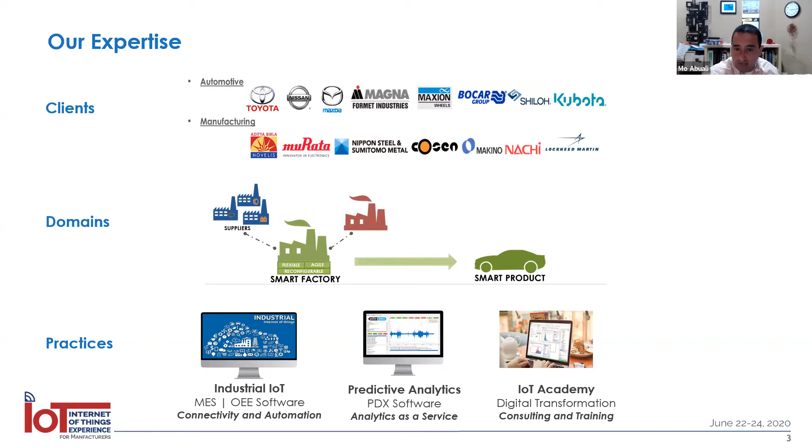I personally have been in the industry for about 20 years. I've worked with companies like Toyota, TMMK, and conducted projects with a lot of automotive tier suppliers, many large, but also many smaller manufacturers, like Detroit Manufacturing Systems. Actually, Isaac will introduce the company later - it's a mid-sized manufacturing company.

Our agenda for today is really four things. I'm going to preface the presentation by giving some introduction and definitions around what is the Internet of Things, what is industrial Internet of Things, industrial IoT, and what is the role of technologies like predictive analytics, OEE, and manufacturing execution systems. We want to talk about digital tools that can support any manufacturer to mature their digital journey in a phased approach, keeping return on investment in mind. Then I'll hand it to Isaac, and he will discuss his personal journey, and the journey of his organization, Detroit Manufacturing Systems, along digital transformation.

Let's get started. The field of Internet of Things is by no means a new field. It has been around for many years, many decades. We've been monitoring safety critical assets and machines and components for many years, even though it was not called IoT, but there has always been the use of data collection, the use of the internet, and the use of connectivity to collect data from jet engines, trucks, airplanes, homes, cars, power plants, nuclear operations, etc. So the Internet of Things is a field about using internet connectivity and analytics to cover all industries, all things, and all devices.

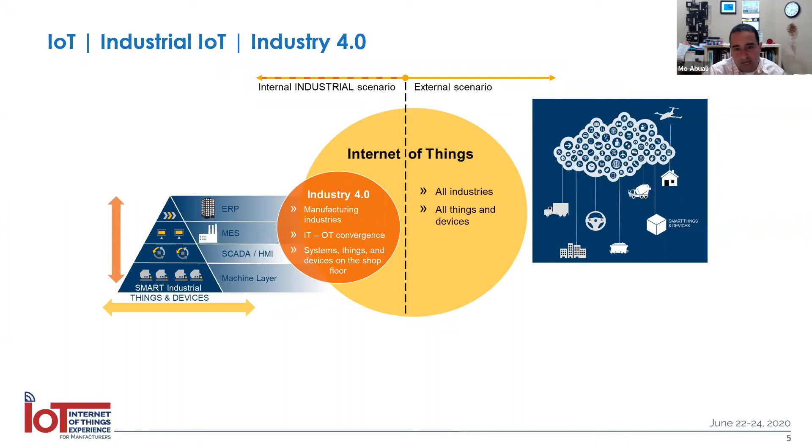And later, Isaac is going to talk about their story of how they were able to make that convergence happen between IT and OT. So Industry 4.0 is a strategy, an initiative for manufacturers today to start adopting industrial IoT practices and improve productivity.

So in a nutshell, when we talk about an Industry 4.0 or digital transformation strategy, we're talking about 4 pillars that manufacturers today should keep in mind as they evolve their maturity on the digital horizon.

We usually start from the right and go backwards. We start from the ROI, the return on investment. What is the business case? I will show some examples of improvements in uptime, improvements in OEE, reduction of scrap and quality issues, and improvement of spare parts. So technology adoption and digital maturity must be able to impact your business bottom line, which is your P&L, your profit and loss statement.

And then we go backwards to connectivity. Are you connected? Are you collecting the right data that is meaningful for the business case you're trying to achieve? Next, we talk about analytics. Now that I have the data, what do I do with it? How do I have real-time metrics, and how can I predict future behavior or future issues down the road?

And once the strategy is proven on a smaller scale, maybe a pilot scale, we talk about scaling that technology, the architecture, rolling it out to more machines, more factories, more geographies or continents across the world. So what's the technology architecture of scaling that solution? Your business case, getting connected, doing analytics, and deploying the right architecture for the technology.

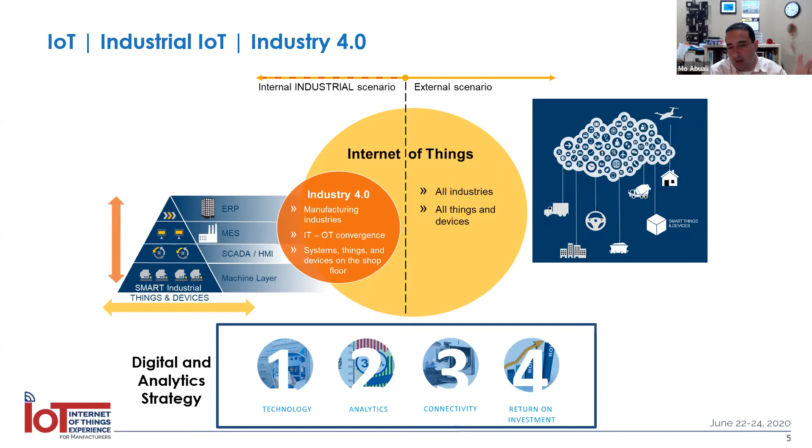These are the 4 key items that I'd like to touch upon, and then Isaac will educate us on how practically they were able to do this within their operation.

I want to give a very simple definition of Industry 4.0. This is a nice graphic showing the transition from Industry 1, 2, 3, 4. Industry 4.0 is about a digital connected world. It was initially a German-led initiative by the German government, which was scaled in Europe and then later in the United States. In the US, the National Association of Manufacturers, NAM, refers to it as Manufacturing 4.0 or Smart Factory. Different organizations have different namings. GE, for example, refers to it as the Brilliant Factory Initiative.

But I want to give a very simple definition: Industry 4.0 is about combining traditional manufacturing practices today with the technological world. Industry 4.0 at its heart is about technology and process, but also about people. And the right mix of people, process, and technology, and the right way that this transitions from an Industry 3.0 to a 4.0 domain, is our approach and how we see manufacturers being successful.

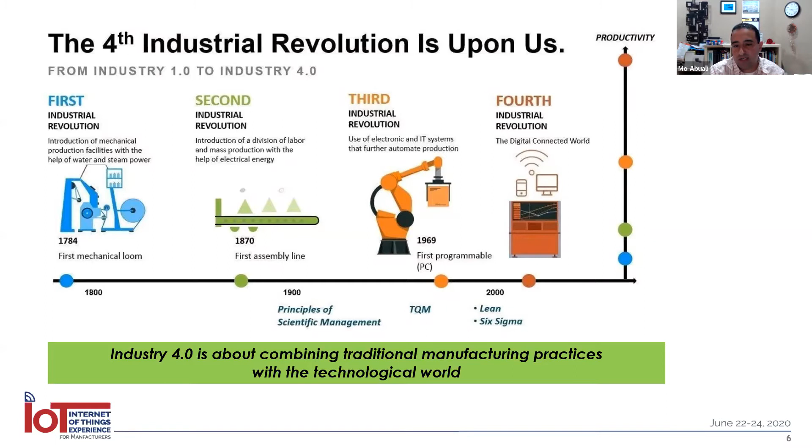So let's briefly talk about people, process, and technology. I want to start with people. This may be the most difficult bubble in the Venn diagram because there's a lot of change management required, maybe improvement on the culture side, and how to make the data and technology integrated cohesively with the people. We like to say the right information should be sent to the right person at the right time.

And we see a lot of manufacturing environments today that are starting to become more automated, so moving from operator controlled to operator intervened to even a lights out manufacturing operation. I heard an interesting naming - they called it a dark factory. A dark factory is a lights out operation that may not require operators to be actually controlling the machines. So it's important to understand the maturity around the people side and the general strategy of evolving the people element in the operation.

Then we talk about process. We're seeing a transition from reactive thinking, short-term thinking, manual processes, to a more proactive, scheduled, long-term approach, to even self-optimizing processes where data is connected automatically, decisions are made automatically, and may even be fed to the machine or the line automatically, so the line can have a self-optimizing approach to running the operation. So there's an evolution on the process side, and then there's the evolution on the technology side.

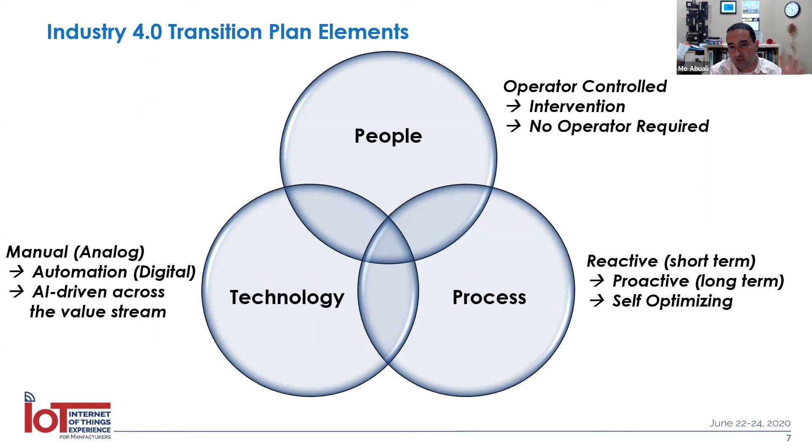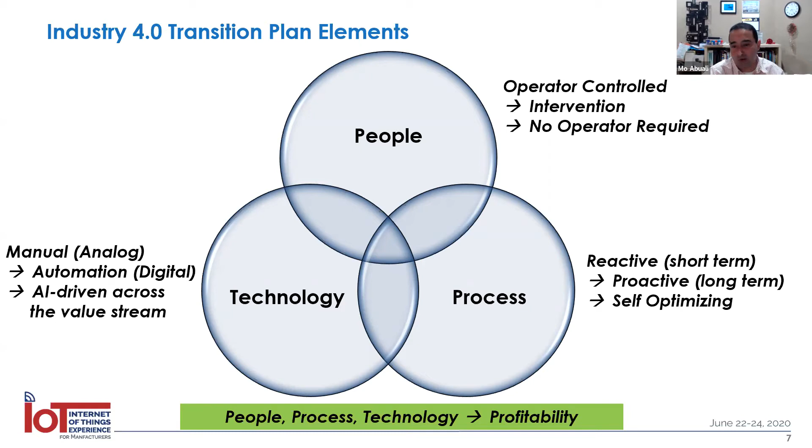But we believe that it's important to understand the digital maturity across your people, technology, and process. And usually the best transition or transformation to Industry 4.0 is governed by your weakest link. So if people is your weakest link, it is important for the company to focus there and make an evolution, versus trying to deploy technology in a factory where maybe the people side of the coin is not ready. With the right recipe around people, process, and technology, there is a quicker approach to achieve ROI and profitability in your digital transformation journey.

So speaking of ROI, it's important to start with the business case, and it's important to track metrics. OEE, overall equipment effectiveness, is a key metric today in manufacturing. By collecting data and having visibility and delivering the right information to the right person at the right time, the OEE metric is a key metric to be tracked in real time and to be improved. Predominantly uptime is a key metric within OEE - availability, performance, quality. So uptime is a key metric for some operations.

We are also looking at using analytics to improve maintenance activities. By catching, detecting, and reducing unplanned downtime using analytics, there is a great opportunity to optimize maintenance activities and to move from a reactive maintenance environment to a predictive and preventive maintenance environment.

We see manufacturers tie into their spare part inventory by having data collection and a predictive approach to monitor your assets. There is no longer a need to keep a high value of spare parts waiting for things to fail. We see manufacturers using analytics to drive reduction in their spare part inventory and being able to be predictive in the replenishment of new spare parts.

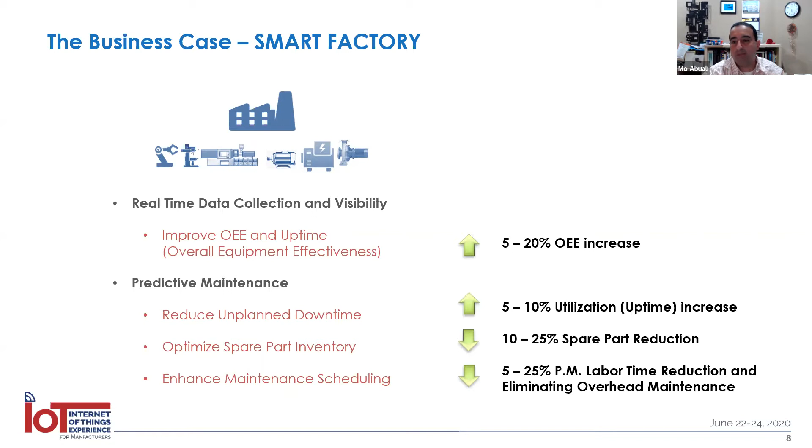The numbers I'm showing here are true numbers from manufacturers today, large and small, who have embraced analytics, connectivity and data collection. They have seen immediate improvements anywhere between 5 to 20% in their overall equipment effectiveness, 5 to 10% in their utilization, reduction in spare parts of almost 25% by being able to optimize maintenance and use analytics, and reduction in labor time.

When we used to work in automotive plants, when you go and fix a machine, you have a very strict time-based schedule, and you would go in on a robotic, for example, and change the bearing in all 6 joints of the robot. But now that we're able to sense data from the robot and predict that a specific joint is going to fail before it fails, you can reduce the labor time, fix the right area in the robot, and reduce your spare parts.

So it is a maturity curve. It's a phased approach for your digital journey, but it all starts by getting connected, analyzing the data, and having proactive decisions.

Some manufacturers have eliminated overhead maintenance. Due to the time-based schedule of maintenance, they used to run maintenance on weekends, Saturdays and Sundays, but using analytics and making optimizations, they've actually been able to eliminate weekend maintenance and drive a just-in-time maintenance approach to their factory.

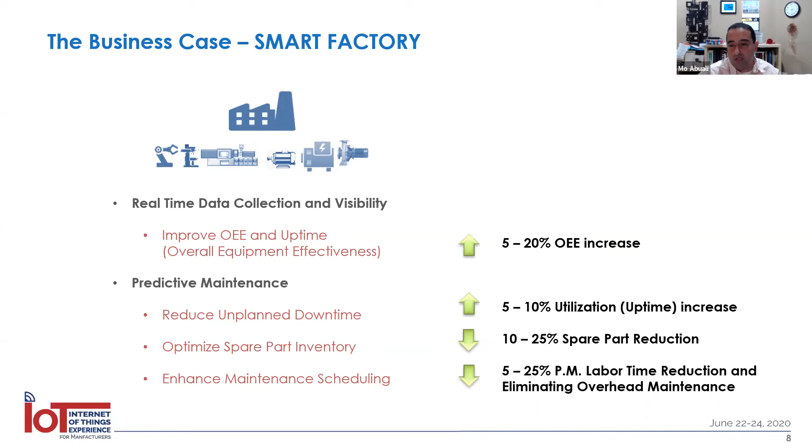So start with the business case and have the business case dictate where you are today, and then what technologies should be enabled to support you to digitally mature in your journey.

I want to touch on a few technologies just to give you a feeling. I want to touch on connectivity to the machine layer. I want to touch on data collection and metrics. I want to briefly touch on manufacturing execution and predictive analytics. I want to give a hint to some of the digital tools that are around today.

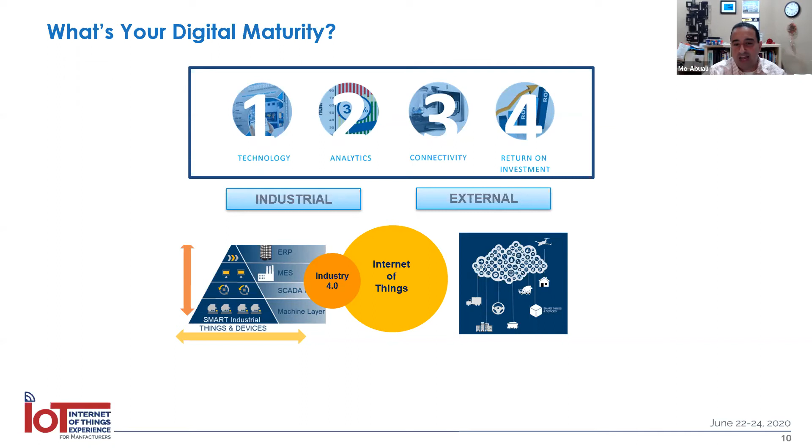I'm going to start from industry 3.0 up to industry 4.0 technologies. The reason I'm doing this is we believe those 4 pillars are indicators of your digital maturity. We have an assessment approach when we work with clients where we do a digital assessment, looking at and benchmarking where the manufacturer is regarding connectivity, acquisition, metrics, and MES, and using that to create a digital readiness analysis and report to support the manufacturer.

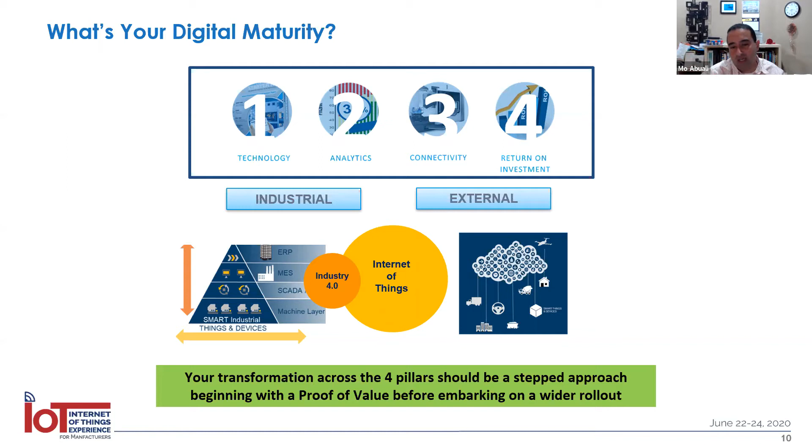So ask yourself, and you may already know the answer, what is your digital maturity today across those layers: your machine, your data collection, your execution, and even your ERP? Let's start at the bottom of the pyramid: connectivity.

Some say manufacturing data is the new oil. Manufacturing data is the foundation to achieve ROI. It's very important to have a data lake, and that data lake should be able to support multiple systems, be it your OEE system, your ERP, or your execution system.

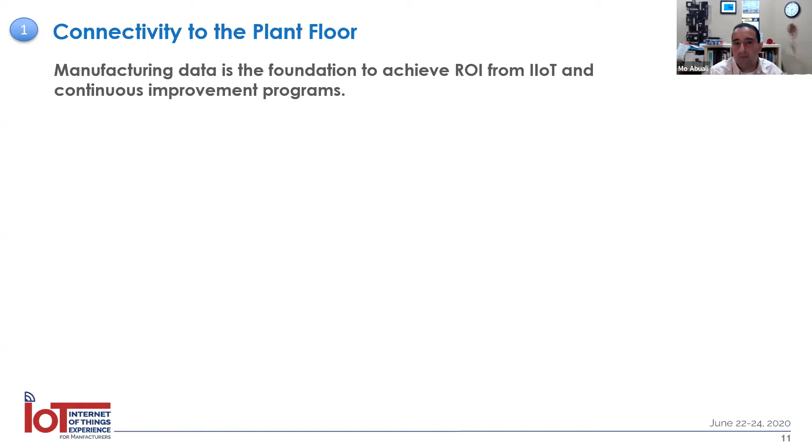When we go in, we look at and ask a few key questions. Is the machine capable of communicating today? It's important to understand that in any manufacturing facility, there are new machines and older machines. Some machines have an Ethernet port, some have been around for decades. They're still running, still making good parts, but they are legacy machines, and there has to be a way to communicate with those machines.

It's important to look at the network side and the cost benefit of networking and cabling the machines, making them IoT ready or IoT enabled. We look at time - how long is it actually going to take, and what is needed on the machine to be active, and what is needed externally on the software side to communicate to the machine.

The most important question at the end is, what data do you need from the machine? So what is the use case? The use case dictates the type of data that I need to capture from the machine. I'll talk about some examples here.

But we always start with an audit. A senior automation controls person would visit the operation. Depending on the size of the factory, there will be a 2-day, 3-day, or 4-day audit. It's important to open control cabinets, look at schematics, and have a clear understanding of the age and capability of the machine to communicate to the outside world.

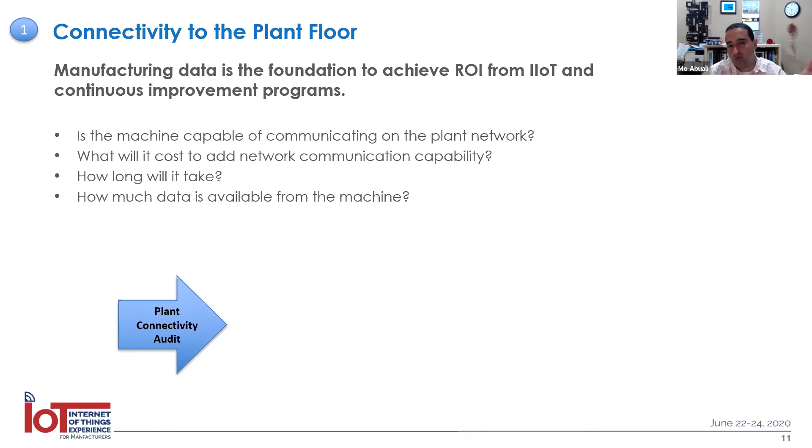Then we have a connectivity process that we follow. We look at network readiness - does the machine have an Ethernet port? If so, is the machine connected on the network? If yes, what is the data map that I need to capture from the machine? What are the signals or tags that are indicative to the OEE or to the use case that I'm trying to derive from the machine?

If I'm looking to capture real-time OEE on a machine, for example, I'm looking at the cycle start on the machine, machine on/off, a piece counter, maybe a reject signal from the machine, and the fault code - what are the fault codes or warnings happening on the machine?

There are specific data maps or data models that are important to identify, and those data models are then made available using a data lake, a historian, an OPC server, an MTConnect agent - there are many ways. It's dependent on the machine type, the capability of the machine, the age of the machine, and so on. But it's very important to make your assessment here on the connectivity side, because connectivity is your foundation, and connectivity enables the rest of the systems to go in place in the right approach as you mature your operation.

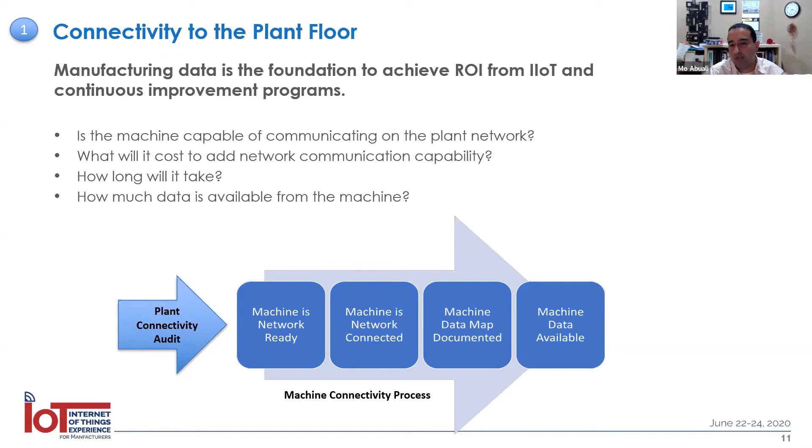So now that we're connected, the data starts flowing, and the data is used to drive real-time metrics to the manufacturing operation. We define two types of metrics: performance metrics, which historically give you an indication of your overall equipment effectiveness - that's your OEE per machine, per line, per building, per plant - and enterprise level benchmarks.

Don't get me wrong, there are many other performance metrics as well. There's your mean time between failure, your mean time to repair. Some folks use TEEP, theoretical efficiency of the machines. And then we talk about predictive analytics, the health of machines, predictions of issues that might happen, remaining useful life. When is my spindle bearing on the machine going to fail before it actually fails?

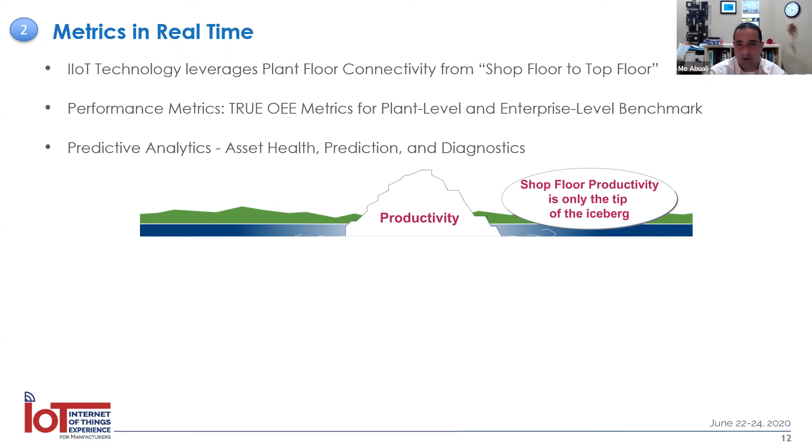If we look at it from a simple iceberg chart, a lot of folks are measuring productivity today. They're measuring pieces, how many scraps, how many hours the machine was running. But if you look under the surface of the water, we're talking about unleashing the opportunity in the hidden factory.

We're talking about metrics that drive productivity: uptime, real-time uptime coming from the machine controller, and performance, measuring the speed of how long it took you to actually run a part. Your ERP is a great solution - it's telling you that your standard time to run the part is 30 minutes. But how much do you trust your standards today, and how can you improve your standards?

By communicating to the machine and tying the shop floor to the top floor, you're able to clearly understand machine runtime, part runtime, which is your performance, and quality - how many pieces, how much scrap, what was the reason for scrap or rework, and in some cases, additional quality information and measurements.

And then you have below that, the health of your asset. Is my spindle bearing on the machine going to fail? The remaining useful life of your asset - how many days or weeks is it going to take for this to fail? And diagnosis - what is the root cause? Is it the inner race of my bearing? Is it the outer race of my bearing?

Even though some manufacturers are measuring OEE today and have a good level of maturity, running 90% OEE, 85% OEE best in class, the machines still fail. And when the machines fail, there is unplanned downtime and issues with spare parts and maintenance. So we see those folks measuring OEE and having a high level of digital maturity ready to embark on that journey using AI and predictive analytics.

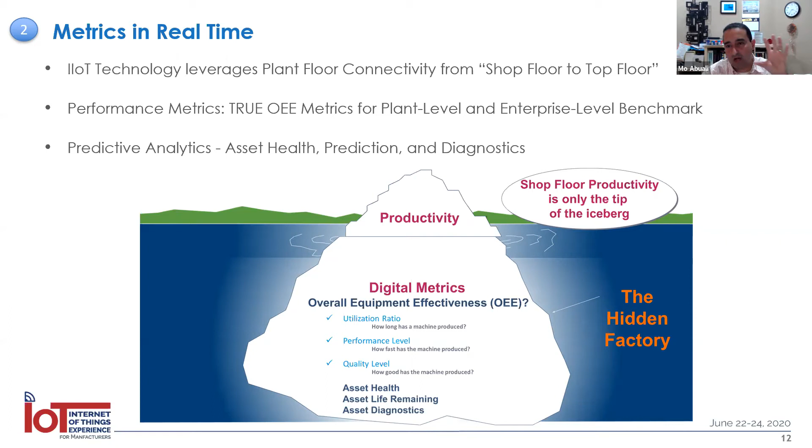So what metrics are driving your business case based on the connectivity? And then you have visibility - visualizing your overall equipment effectiveness, integrating data from the factory floor together with data from your enterprise resource planning system. We're talking about many solutions available in the market today that give you a web-based, mobile-based experience.

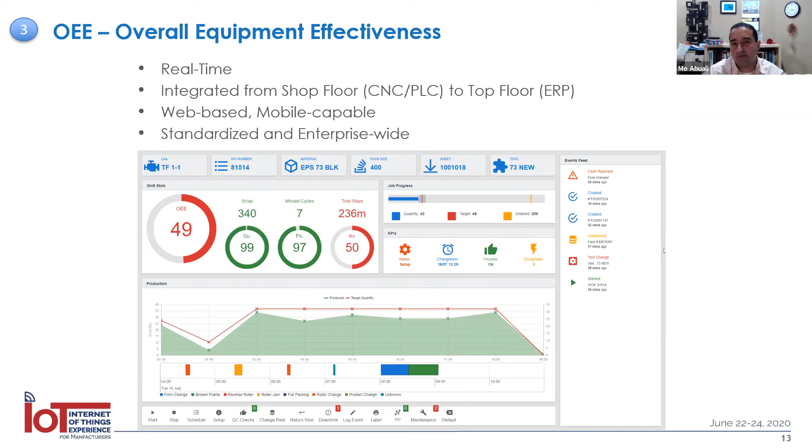Then we talk about expanding. We talk about the MESA organization, which runs the manufacturing execution systems. It's a global organization, and they categorize execution on the factory floor in four buckets: production, inventory, quality, and maintenance. OEE is the start - that's your production operations.

But how about traceability and genealogy of my part, especially in aerospace and automotive? If I have a recall or a warranty issue, how do I trace that part back? How do I have a birth certificate of my part from the raw material through every operation, every machine, every person, directly to the end product that was shipped and maybe placed inside my car that is running on the streets? So traceability is key. And at the end of the day, these manufacturing execution functionalities like traceability, quality, warehousing and maintenance are modules to your manufacturing execution that can be enhanced and added over time as digital maturity improves and the level of connectivity improves.

We also believe and see in the industry today the use of templates.

Gone are the days where you have a toolbox and have to develop and create things from scratch. There are many out-of-the-box solutions today for large and small organizations that are very affordable, can be deployed rapidly in weeks, and deliver value in days and weeks, not months and years.

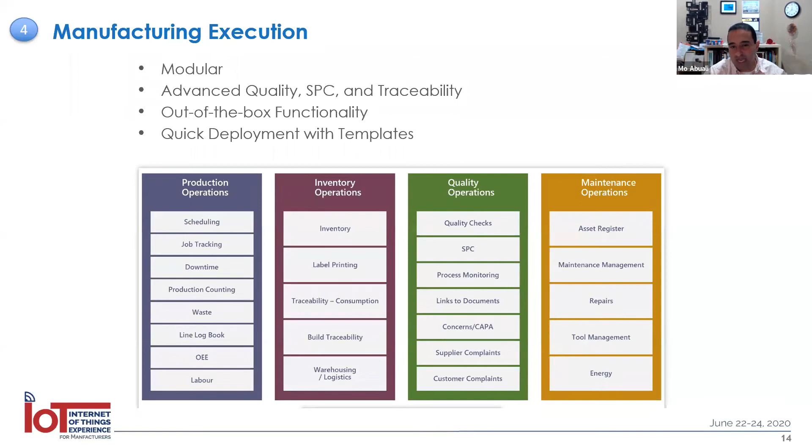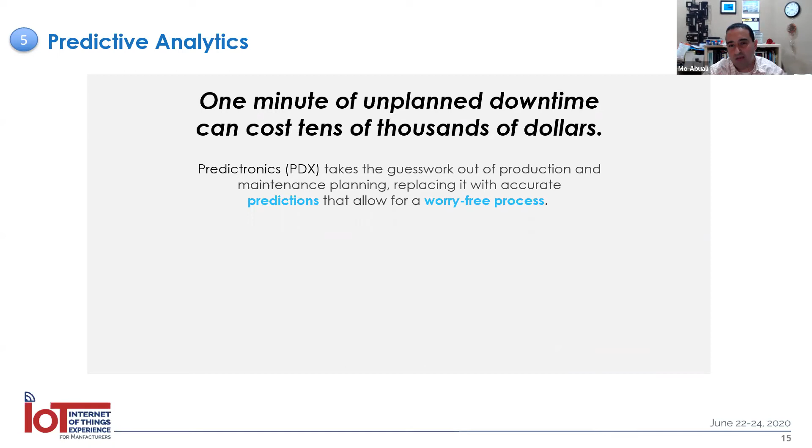Now the last piece is predictive analytics. So we've gone through connectivity, metrics, OEE, manufacturing execution. The tip of the iceberg, the holy grail for some more mature manufacturers is: now I have the data, now I have the data lake, I want to start doing predictive maintenance. I want to predict issues on my machine before they happen. I want to start doing prescriptive analytics and predict quality issues on my part before I make a bad part. So now we're talking about tapping into that same data lake and using pre-built solution templates, artificial intelligence, machine learning, and advanced mathematics to deliver more value to the manufacturing organization.

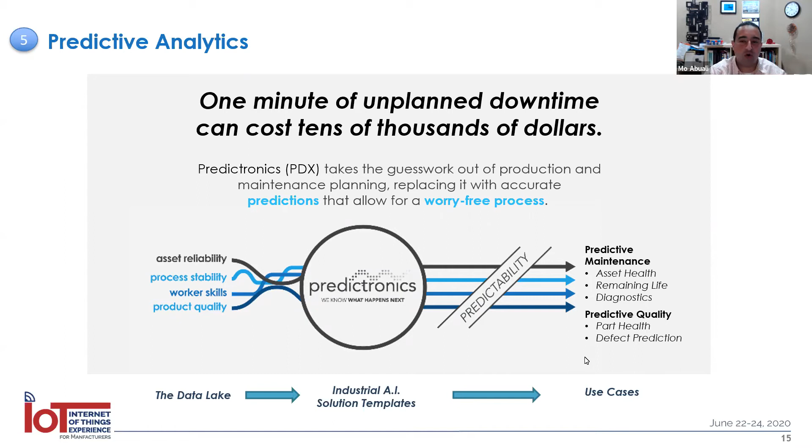When we look at manufacturers today, we look at a variety of processes: high volume, low volume, high mix, low mix operations. We see capital intensive industries with a lot of robotics, CNC machines, casting, stamping, ancillary equipment. In our domain of experience, coming from manufacturing, we have an industrial data science team who excels at using vibration sensing and data coming out of the control to give more insights into what's truly happening in the machine.

Is my axis on the robot going to fail, and when? Is my spindle bearing or my ball screw on the machine degrading, because that degradation might lead to an issue on the machine? My casting equipment is very complex—I have 50 to 100 process parameters being captured in casting and molding. There is a direct correlation between the casting parameters and the health of my injection rod in my injection molding machine, and the health of the part being produced. If one of those parameters is out of spec, it might lead me to make a bad aluminum cast or a bad plastic mold.

So by using analytics and correlating process parameters and machine parameters with quality data, we offer more insights into predicting machine issues and quality issues on the part. I think the situation boils down to how out-of-the-box these solutions can be, how affordable, how quick to deploy, and how easy and intuitive those solutions can be for manufacturers today.

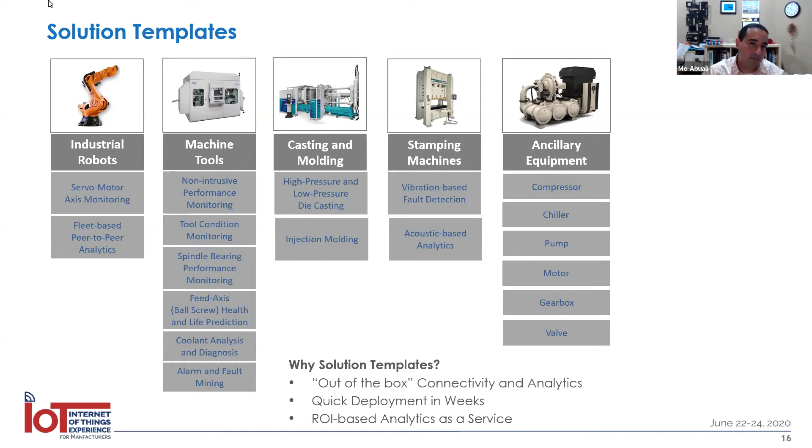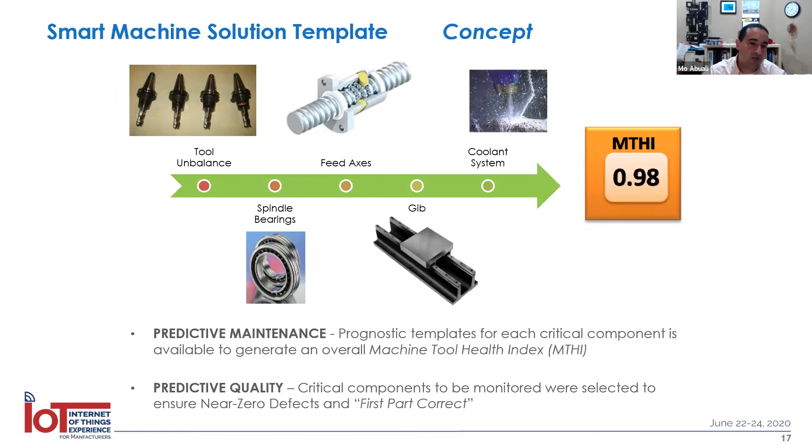If we look at an example here for a CNC machine, we're talking about a complex machine with multiple components that might degrade, including bearings, your ball screw, your feed axis. But the end user here is the maintenance organization. Once the data is captured from the machine, the maintenance organization is looking for an intuitive way to understand: is the machine performing? Is it degrading? What is the reason for degradation? And when is the machine going to fail, before it fails, with accuracy?

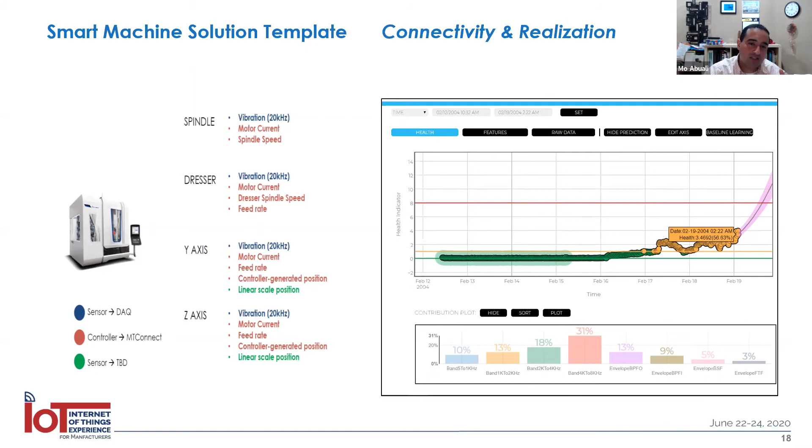So those are technologies we see across the way when we talk about getting connected, visualizing the data and the metrics in real time and tracking them, getting to a full manufacturing execution with trace and quality and SPC, and then using that data to drive your predictive analytics journey, maybe for the more mature organizations.

And to do all this, there has to be a team behind it. There has to be a business case established. And I'd love now to hand it to my good friend Isaac Bennett from Detroit Manufacturing Systems to talk about his journey and his level of maturity, and give you some insights on how they went through that journey to success. So with this, Isaac, the floor is yours.

Thanks, Mo. Let me turn my fan off here. We're kind of living in a new normal, so forgive me. I have a window open behind me, you might hear some birds. And I've got 3 kids and a dog, so hopefully we get through this presentation unscathed.

My name is Isaac Bennett. I'm the head of IT right now at Detroit Manufacturing Systems, which is a cool little story, and I'll tell you a little bit about that. I've got about 18 years of IT experience, and I've been in the automotive industry for 9 years, almost a decade.

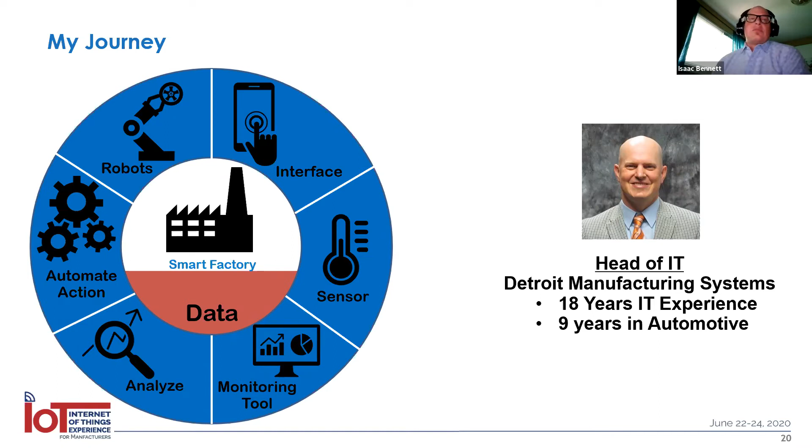In Detroit, we are doing a lot of value-added assembly, just-in-time, just-in-sequence work with Ford. You see the cockpit there and center console, same with the Jeep products in our Toledo facility. And we have in Detroit about 30 injection molding machines where we're doing some molding for some of those parts that we put in the vehicles.

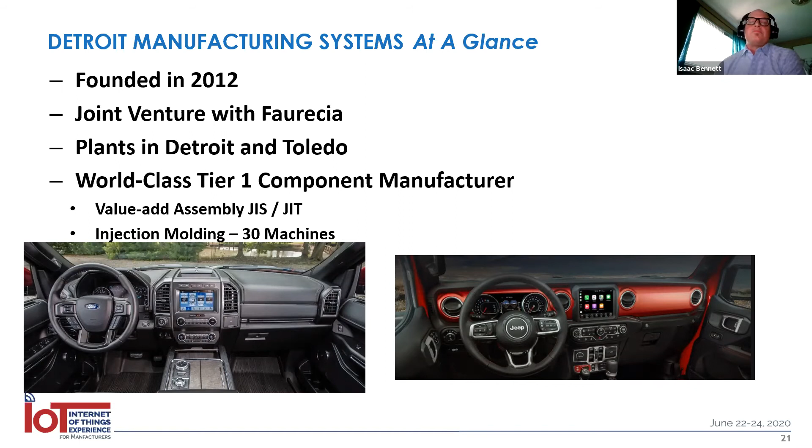I'll tell you about my journey. I've only been with DMS for a little over a year, so a lot of the things I'll reference are from my previous experience at a different company, but I think the story rings true. A lot of these slides, I'll probably be telling a story and trying to describe my journey so that it can be relatable and you can grasp onto some of the concepts and ideas. And I'd say a lot of the stuff I'm going to talk about goes along with a lot of what Mo just previously talked to you about.

So the story from my perspective is, I had the opportunity to go and be an IT manager in our company's facilities in Europe and South Africa. I was managing the IT people who were working directly on the manufacturing floors. And I would meet with leadership as much as I could to get messages from them, because I really wanted IT to be a business partner. And the messages that I got consistently were: we need more help on the plant floor from IT.

So when I came back from there, I was sitting in an IT strategy meeting, a global strategy meeting with the company, and I brought up that fact that the plants were really wanting more technology and more help on the plant floor. I was tasked with going out and finding what that solution was. This was about 5 years ago, where I said, okay, what can we do?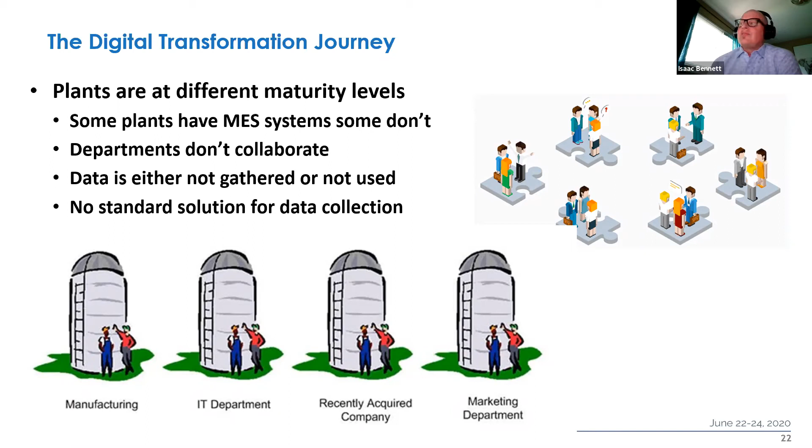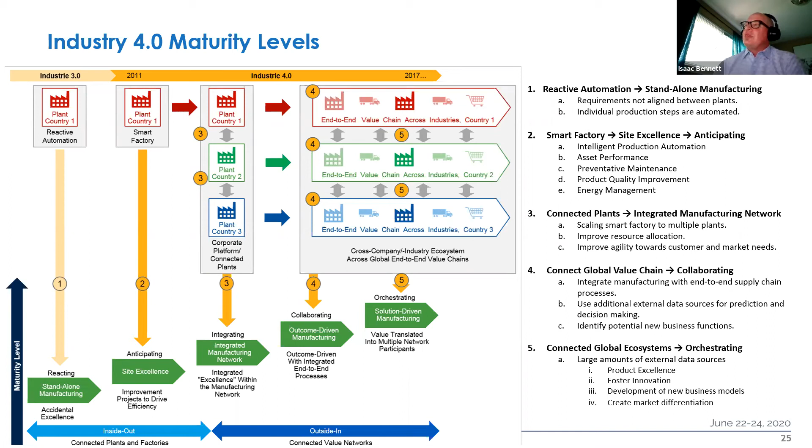Well, you can go to the next slide. The one big thing for me, being an IT guy, is we learned really quickly that in a lot of manufacturing facilities, the IT guys work on the enterprise, the ERP system, they work on the back office systems, but a lot of the IT guys are not touching the OT domain, which is the operation technology domain.

And if you don't have an MES right now, MES is a great way - something to put in, a great tool for measuring your performance on the plant floor, gathering OEE, visualizing data, but it also is a great tool to use to get your IT department and your operation technology guys together in a room, figure out how you're going to implement something like that, and then figure out how you're going to get the data off the plant floor into other tools in the back office, into your ERP system.

But there's definitely been a divide between the IT people and the operations people. That gap is shrinking fast, and there's so much technology going into the plant floor these days that you've got to have your IT people hooked up with that. So we're talking about collaboration again, making sure the IT - that's a great example of collaboration. If those guys are working together, how much more you can get done and how much more value you can get from your plant floor system.

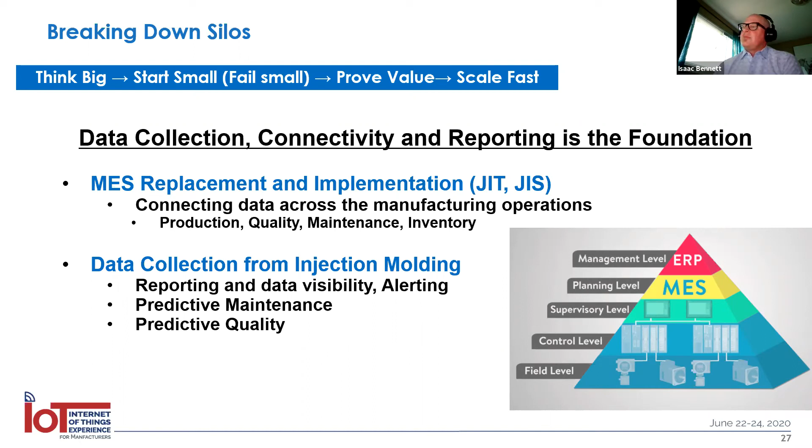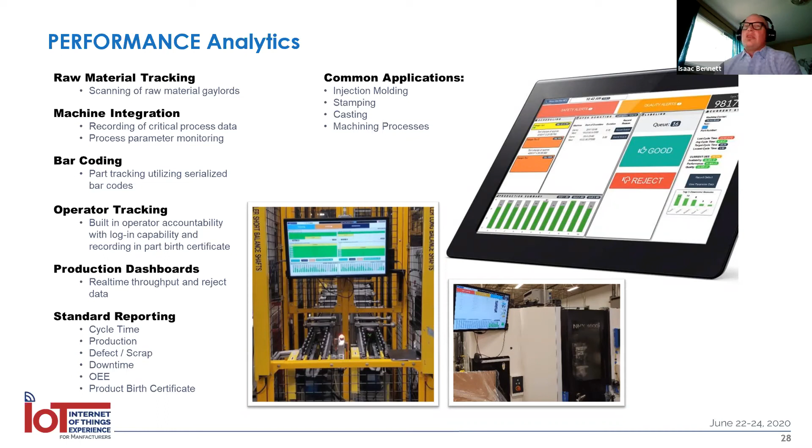I'll give you a perfect example of what we did in a facility in Akron, Ohio. We walked into that facility, and it's an older facility with very old machines, probably 1950s, early 60s type of steel stamping machines. There was one line that had a particular issue - when this one roll forming machine would go down, it would of course stop the line and cause big issues.

So when we walked in there and presented them, we said, hey, this is Industry 4.0, it's really about connectivity and where the data is. We wanted to do an evaluation of where we're at. We looked, and they said, well, this one machine is an issue, what can we do? So we took a deep look at that one machine, and we really narrowed it down to just the top tooling and lower tooling of that particular machine, to see what we could do as far as machine health and predictive maintenance on it.

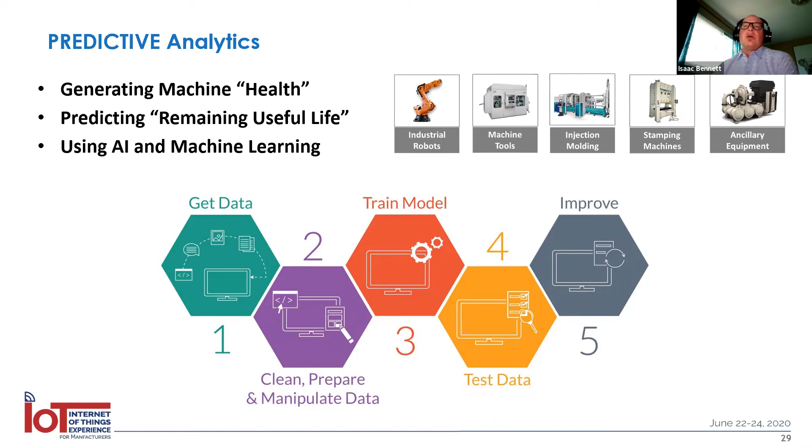So you can go to the next slide, Mo.

I'll continue here. With that in mind, I learned pretty fast in this process that, you know, I always heard when I started this: look for the low-hanging fruit. And I honestly am not so sure that's true. I think you want to look for the biggest bang for your buck - that is the thing that you want to look for.

Industry 4.0 is a very complex idea with a lot of different scenarios and different technologies involved. If you think about it as the whole concept, you can get really stuck, sometimes in this perpetual science project where you're trying one thing out, then another. What I learned really quick, just like going into the Akron facility, is if you find one area that is a big bottleneck or a big problem, that is something you can replicate in other machines or facilities, that's what you really want to go after.

And we talk about ROI. Think about if this machine breaks, what's going to happen? Or if it starts misbehaving and we have bad quality, how much could that cost us? So my thinking was to look for those specific ideas but have the big picture in mind. Think big, start small, prove value, and scale fast. So have the big picture of Industry 4.0 in mind, but then look at very specific problems.